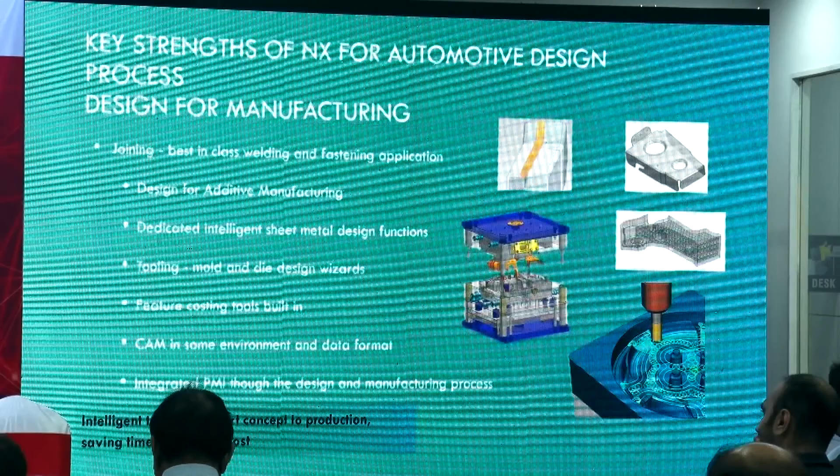Now, mold design automation process. Right now the challenges are global competition - people are coming from China and other countries, and market share is getting divided. Even for the mobiles you are using, half of them are made from other countries; we don't manufacture the complete mobile or automobile. So these are the challenges: products are getting more complicated, and customers are expecting high quality in those things. That's where NX comes into the picture.

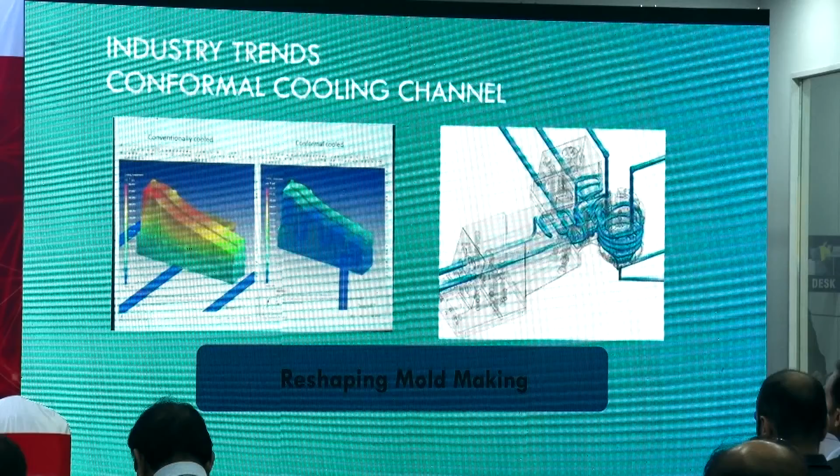When we talk about technology, earlier to make normal water cooling in the punch or cavity, you just had to do some drilling and pass through the channel. Nowadays they've updated to something new called conformal cooling, which normally cannot easily be done using conventional manufacturing. Even in metal 3D printing, you can make your complete punch with conformal coolings, and that design can also be done here.

There are multiple solutions available - you can create your component, generate punch and cavity, then create a complete mold base, or import mold bases from standard mold base manufacturers like DME, Hasco, Futaba. There are companies who make those molds, and you just have to select those molds from the catalog and start using them.

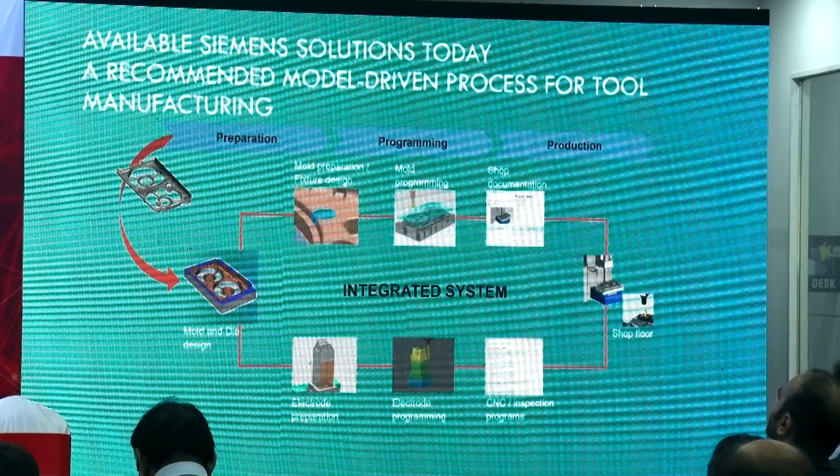The next challenge is with customer data. When I say we are using NX, not everyone will be using NX. There will be customers using other software, like SolidWorks or Creo, and they will provide you with that data, and you have to create the punch and cavity or the mold. So is it possible? Just a few minutes ago, some people were asking if we can work with other software's data to create the punch and cavity. Yes, that is also possible.

So NX came up with an idea called synchronous technology, where you can import and use data made in another software, and then directly make modifications to it. For example, if you have a model made in SolidWorks or Creo, or it's coming from another company that doesn't use NX, you can use that data, do the modification, and start creating your mold, irrespective of which software was used to create that model.

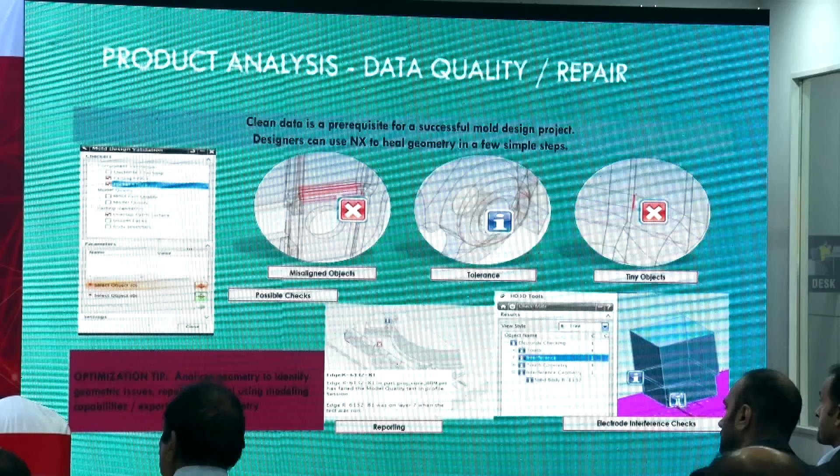Then for molded part validation, there are multiple checks. You can check wall thickness for uniformity, and check if there is any reverse draft present, that can also be validated.

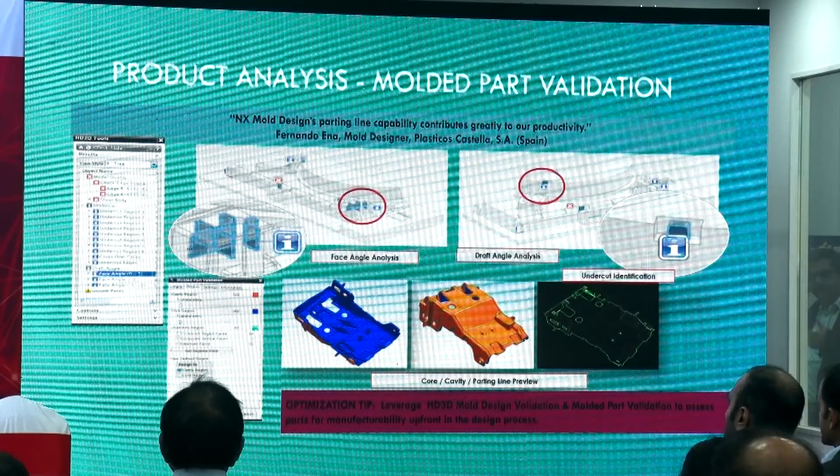It's a simple typical part, for example a mobile cover. After creating the complete mold, if you later decide to update or change the model, the complete mold base will update too, not just the mold. There are mold base libraries, which I explained earlier, so you can import mold bases from another mold base manufacturer and use them.

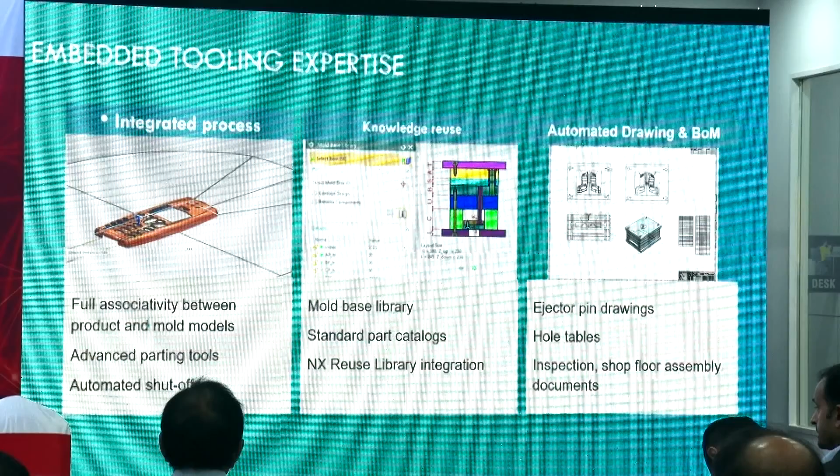So this mold base creation or mold wizard will also be included in the whole syllabus.

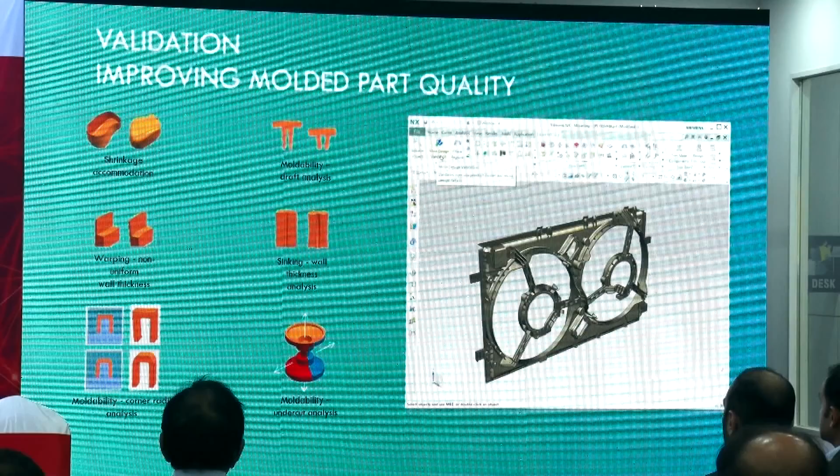In validation, you can also check for molding, meaning whether material will fill the complete punch and cavity. Doing the complete simulation, whatever mold you make, it will simulate on screen whether it is moldable or not, or how the mold will work completely. That will also be covered in the syllabus.

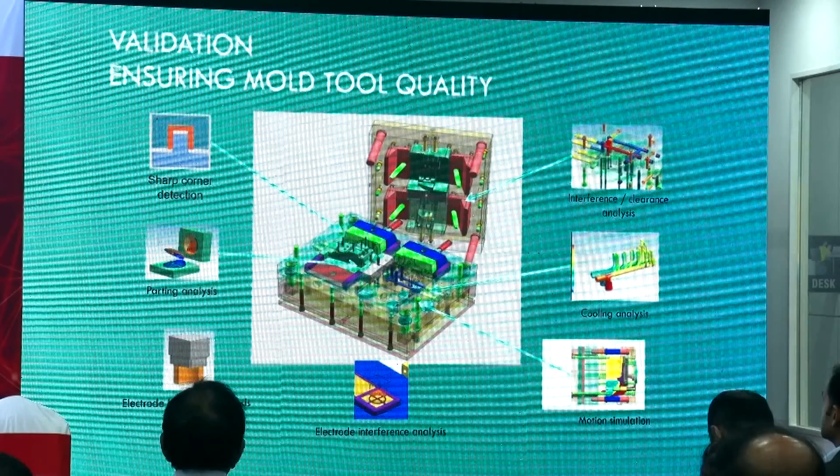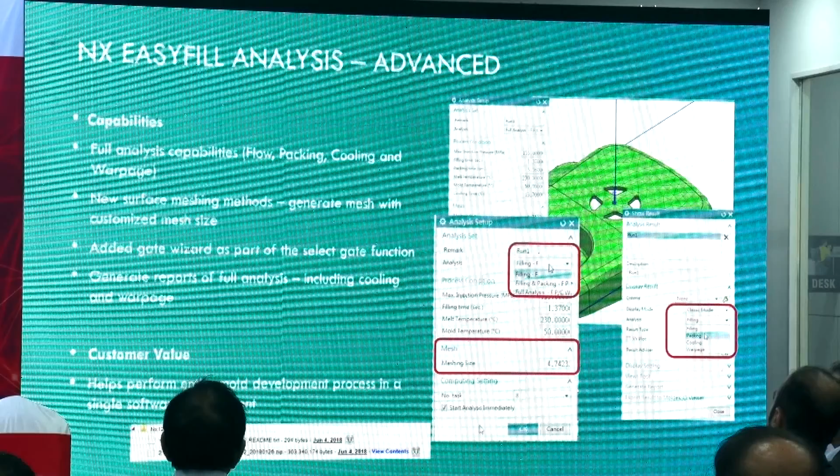Then you can check for mold quality and easy fill analysis, meaning whether the complete molding will create any warpage, shrink marks, or breaking, or whether it will fill properly or not. All those options will be taught in your syllabus.

So in a single system you are able to create the component, create the mold, send it for manufacturing, or send it for 3D printing, covering all your requirements for digitally manufacturing those components. Once it's done, you can also check it for inspection, that module is also there.